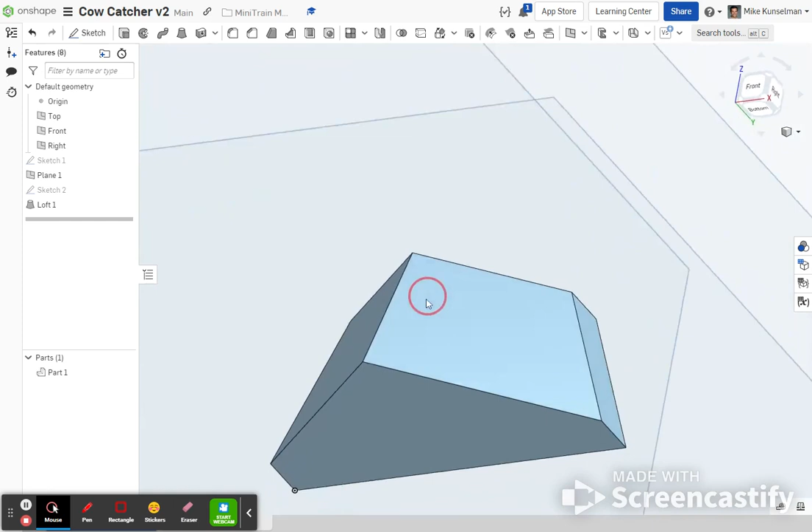All right, so this is part two of the cow catcher. We're gonna flex some pretty cool tools to do some fairly difficult actions had you not had those tools. Okay, so again, like in some of my other videos, I want to get rid of all these planes, so I'm gonna hit the P key, boom. Now I just have the bulk of my cow catcher ready to work.

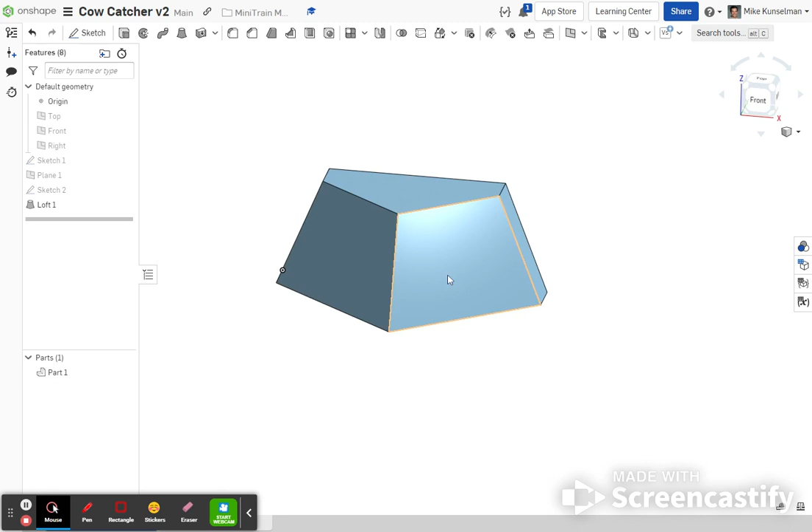So the first thing we do is shell this cow catcher out. If you make your extrusions in these front planes first, you're going to be left with a weird shell. It's going to try to maintain a thickness around those cutouts, so you'll really just be fighting yourself if you do that backwards. So let's click that shell tool.

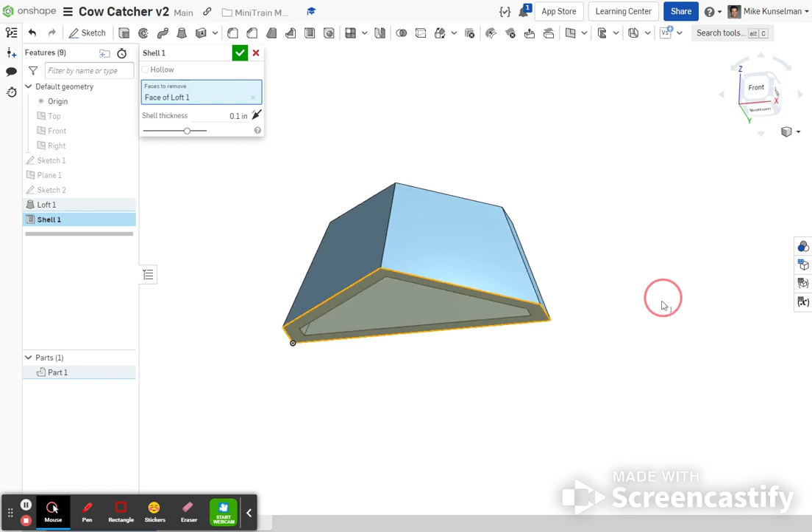Okay, the face we want to remove is this bottom face. So let's click here. The default thickness is 0.1, and that is in fact what we need. So we'll leave that as 0.1 inch thick shell. Looks great. Check mark. Okay, so that has done a pretty difficult process if we use any other traditional methods.

Okay, now I'm going to create an extrusion on this face right here. I'm going to create a sketch. Now, if for some reason you can't create a sketch on this, that means that you messed up your loft somewhere and you have to go back, double check your dimensions, that everything's exactly where it needs to be. Okay? That is a major telltale sign that that has some kind of weird curved surface because your loft didn't generate correctly.

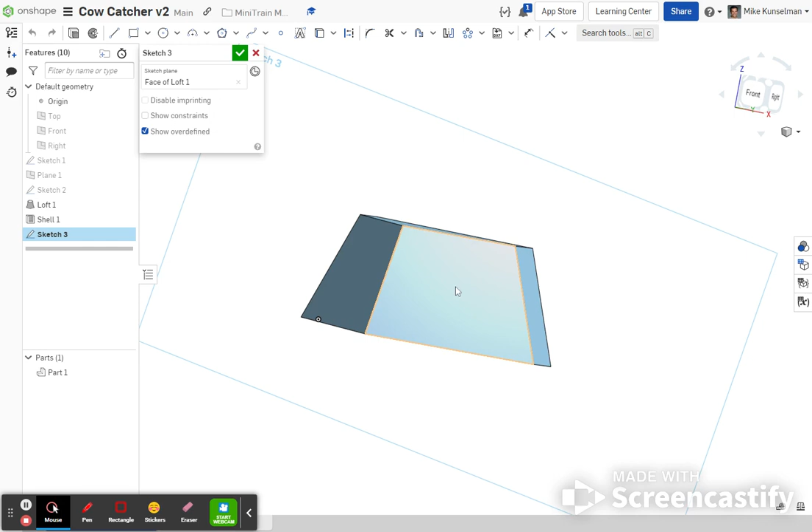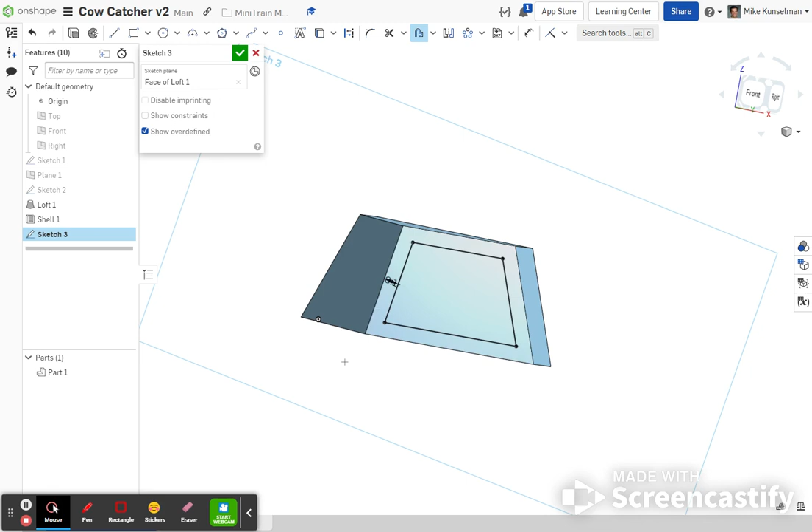So this is a real simple offset tool. If I come up here, it kind of looks like a little maze we started making. This offset tool is going to allow us to click on this surface, and it's going to create all four lines. It will default to shooting those outside. We're going to drag this arrow so we're going on the inside. This offset is 0.1. And now we could finish this, extrude it, create a plane, mirror that feature, but honestly, that's not any faster than just making another sketch.

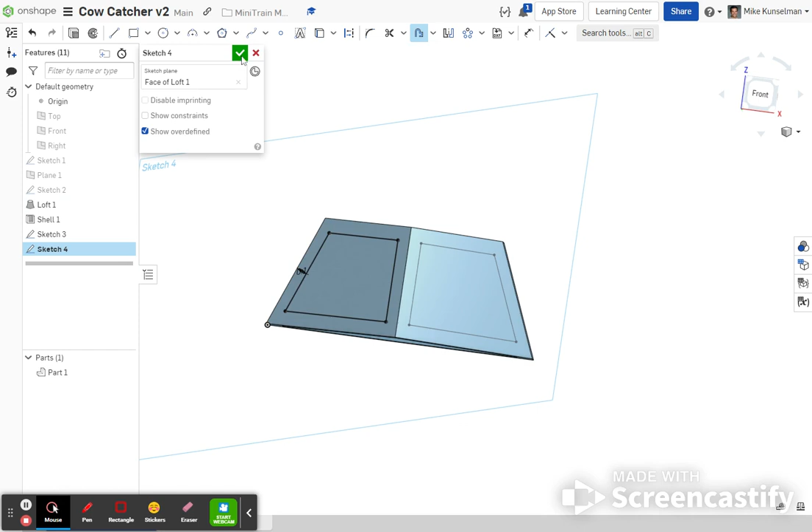Okay, on this side, grab that offset tool again, click on that surface, get that going in the way we want, and make that 0.1 as well. And now we have to make these extrudes as two separate extrudes, or they will kind of come out weird. So this is going to be a remove, and that removes 0.05. Okay, it doesn't go all the way through, and we got to finish.

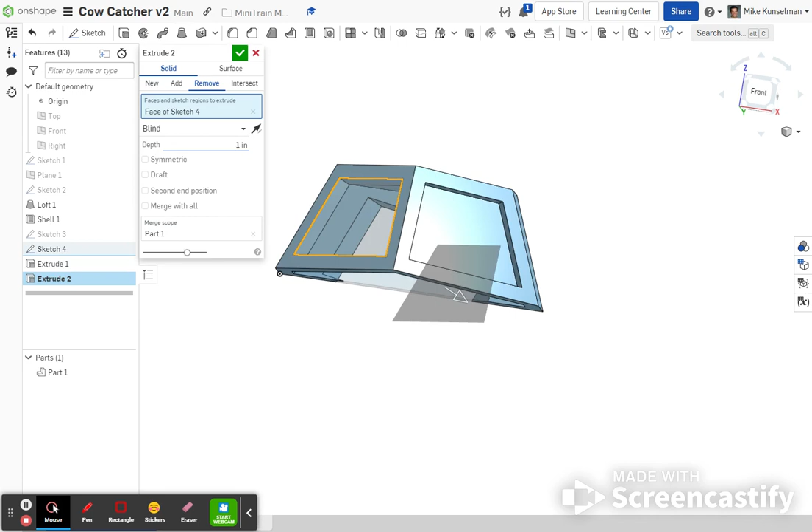Okay, then we do another one. Pick that surface, we remove 0.05. Good to go. Okay, there's our two cutouts. It looks beautiful. Got a nice smooth interior. These final three things on the back, these pegs, I don't really need to make a video of this. By this point in class, you should have something like this pretty down pat.

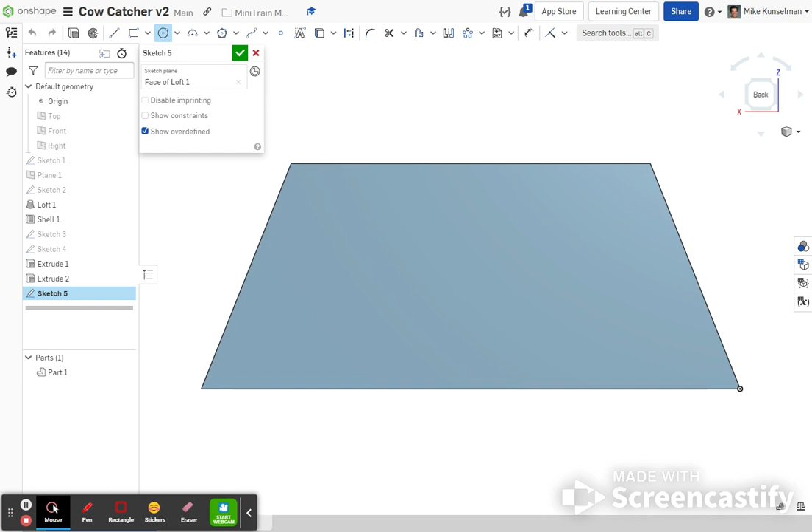Okay, these are just three circles. These three circles have a diameter of 0.125. Okay. I could have made sure that was snapped to center, but I'm going to have the dimension tool in my hand here in a second. So I'm just going to kind of do this for good measure. So all of these little cylinders have a diameter of 0.125. These bottom ones are 0.125 from the bottom. Okay. And again, later when we learn about using some functions, you can find a way to make this a lot faster. Okay.

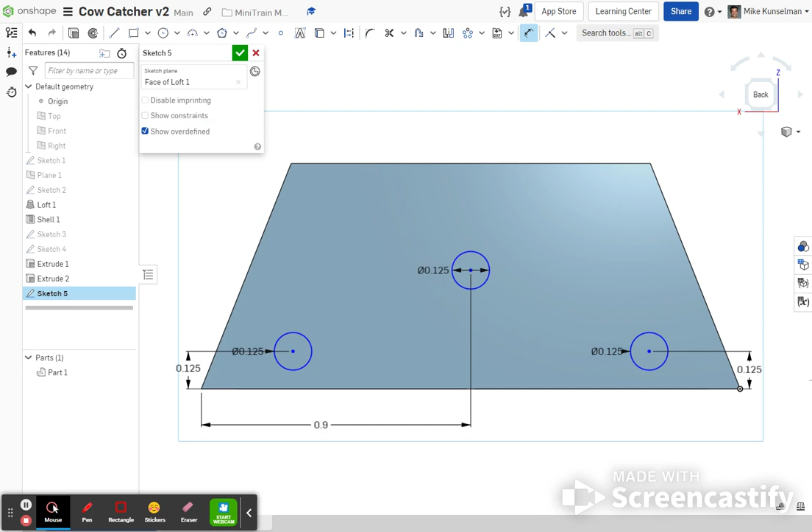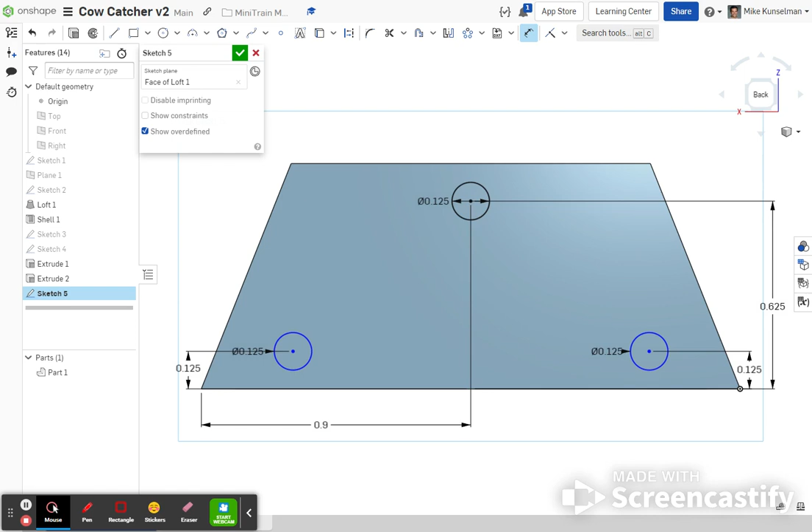This should be 0.9. And I just know that because I remember from my last part that this bottom is 1.8 long. So cool, easy math. This guy then is how far from the bottom? 0.625. And that's from the bottom, not from another shape, I do believe. These all get extruded then. 0.125. So I finish, I extrude. Could have just clicked on that sketch. And I extrude 0.125. Cool.

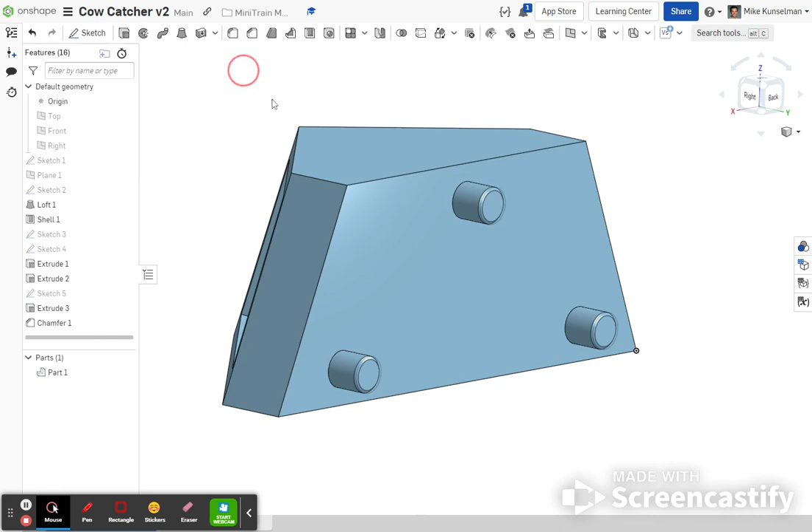The last thing is a little tiny micro chamfer on here. And that little micro chamfer has a size of 0.01. Cool. Chamfer, chamfer, chamfer. Done deal. Make it a fun color if you want. That's not very fun. Cool. Check mark.